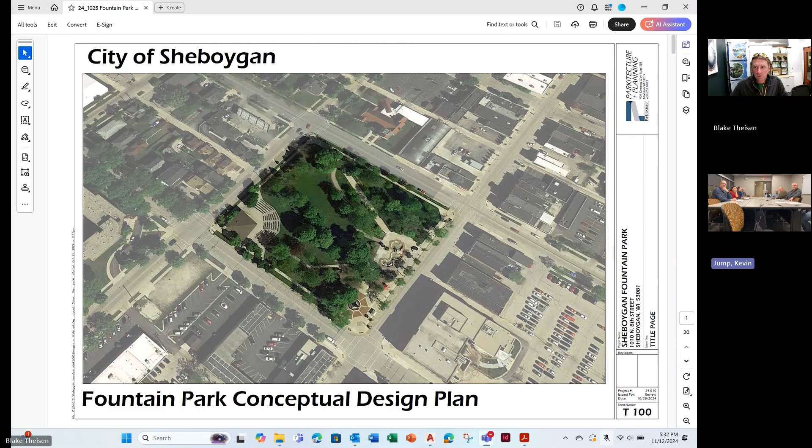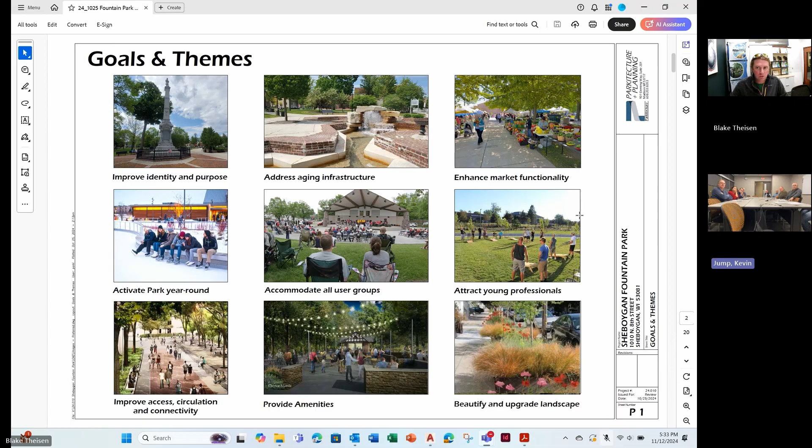So I'll run through some of the upfront items. When we started, we spent some time getting to know both the site itself and the goals for the project. As Joe alluded to, there were a lot of stakeholders that we interviewed, and I'll flip through here so you can see some of the takeaways for the goals and the character we were trying to achieve.

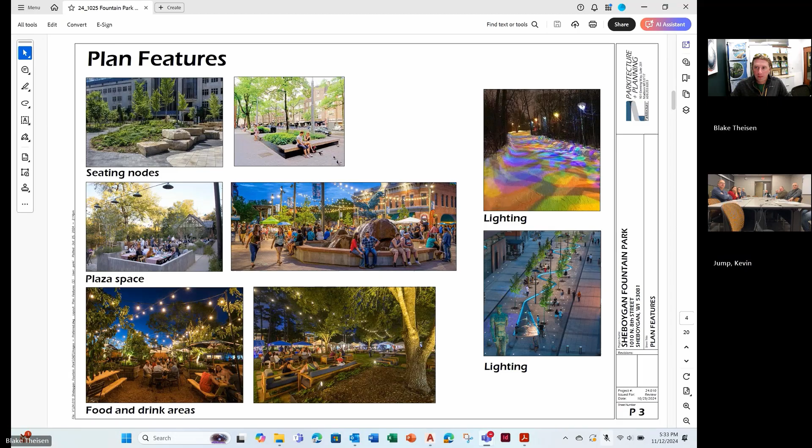I'll highlight some of these. Lighting was a big one. Different seating nodes for different activities and abilities to gather. Water, of course, is a big one, being that it's Fountain Park, so we ended up settling on 2 different water elements instead of just one, and we'll get into that. And then the farmers market, of course, is a major stakeholder and player, so a lot of the design was driven around their needs and desires for the future.

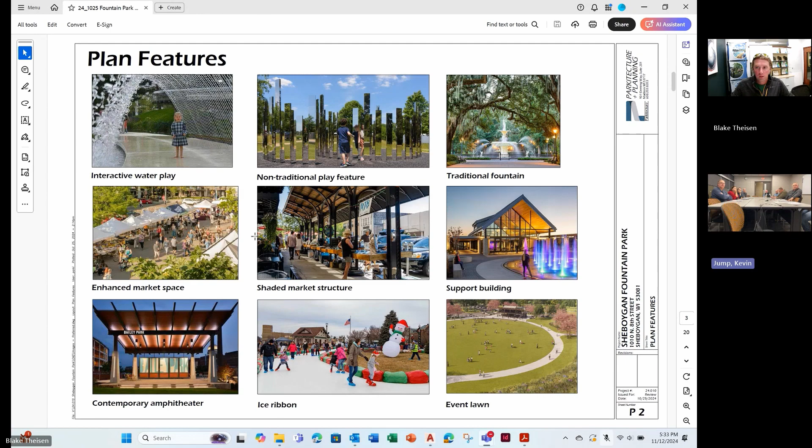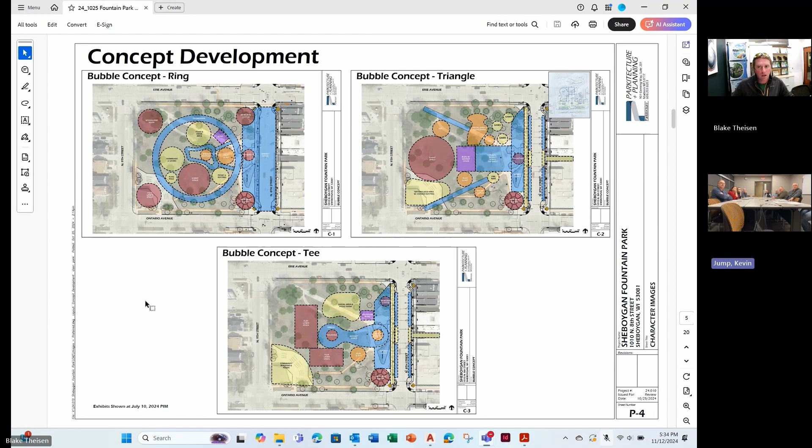So as Joe said, we developed 3 bubble diagram concepts. Those of you at the public meeting have seen these: the ring concept, which was a circuitous farmers market loop; the triangle, which centered a lot of activity in the middle and on 8th Street and made use of the slant walks currently used, especially in the Northwest; and then the T concept, which again tried to draw a lot of energy into the middle of the park. At the end of the day, a hybrid emerged.

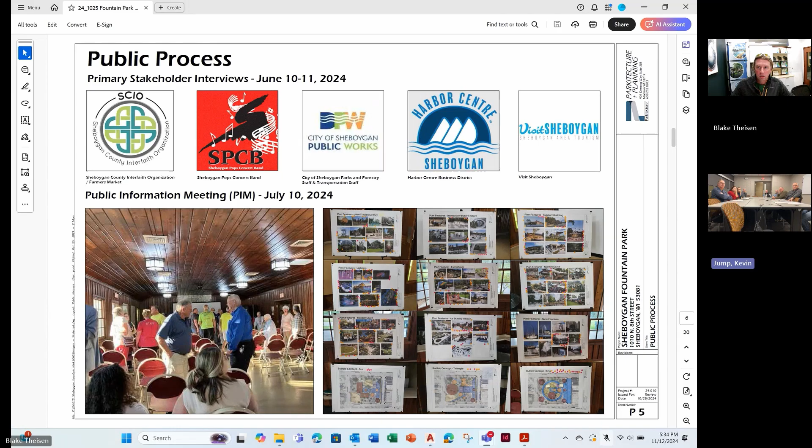We heard a lot of really good feedback at the public information meeting in July, captured all of that on our image boards. A lot of great voting, a lot of good dialogue, and we ended up with the preferred concept, which we kept the moniker of the ring, just because that was really the defining piece: this perimeter farmers market promenade. The center of the park is anchored by a 4-season building, which has the ability to open up on both sides to allow full passage through the park east to west.

We have our classic throwback fountain of our original park design up in the front by 8th, with an interactive water feature in the center plaza. And then our event lawn, now anchored by a smaller version of the band shell—it was ultimately decided that the existing band shell is going to be removed.

There were enough issues with it that it felt like it needed to move on to greener pastures.

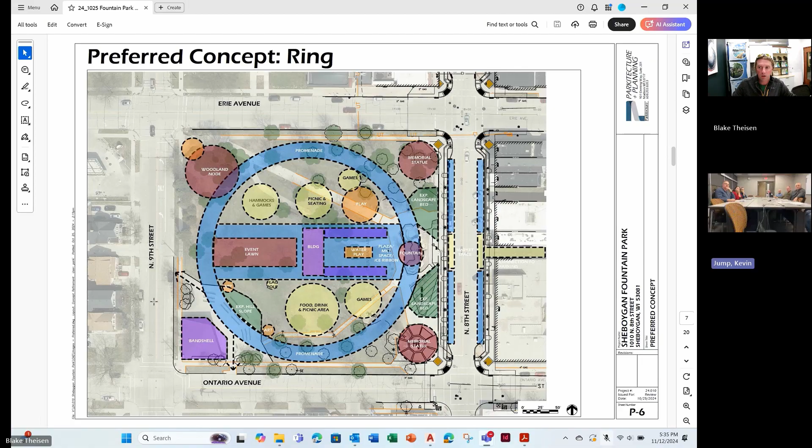The existing Civil War memorial will remain just as it is. We are proposing a relocation of the Spanish War memorial, which sits about here, up into the northeast corner to provide some symmetry of the geometry that we have in the southeast. So now our eastern corners would both be anchored by memorials, which feels very appropriate.

And of course, we've tried to maintain as much flexible open space within the park as we can. I use the term 'designing with rooms' a lot, and you can see we have lots of different rooms in the park for different activities and gathering spaces. So we've tried to activate the park for not just farmers market days, but really 12 months of the year with lots of different opportunities for activity.

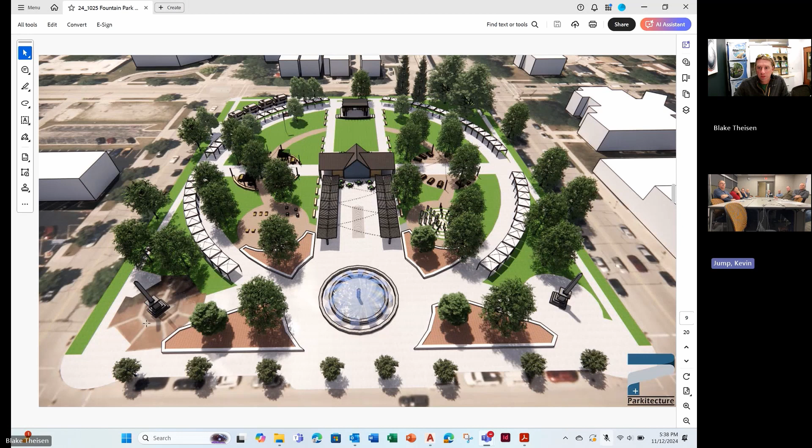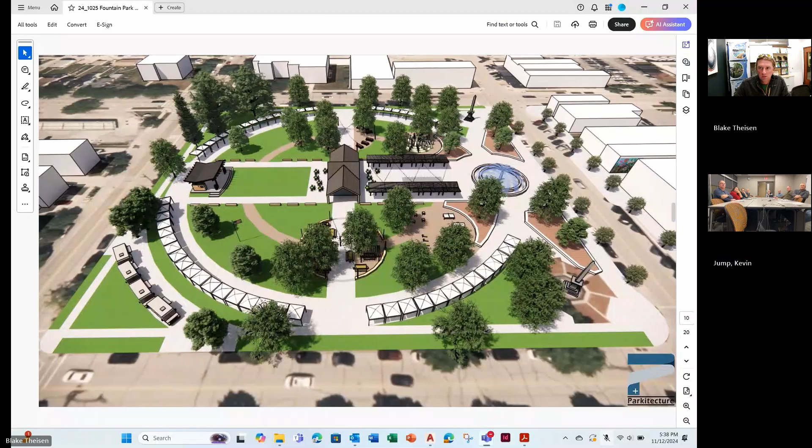So here's the view looking to the west. This is 8th Street, of course, in the foreground. I'm just going to swing around clockwise. This is looking to the north. Looking back to the east, now you can see how that alley becomes a key feature, connecting everything. And looking to the south.

And I'm going to use different angles here. I wanted to show you the relationship of the new band shell and this four-season building. As I mentioned, we envision this wall to be glass garage doors that could open up and allow site passage from this space all the way through the building into the plaza.

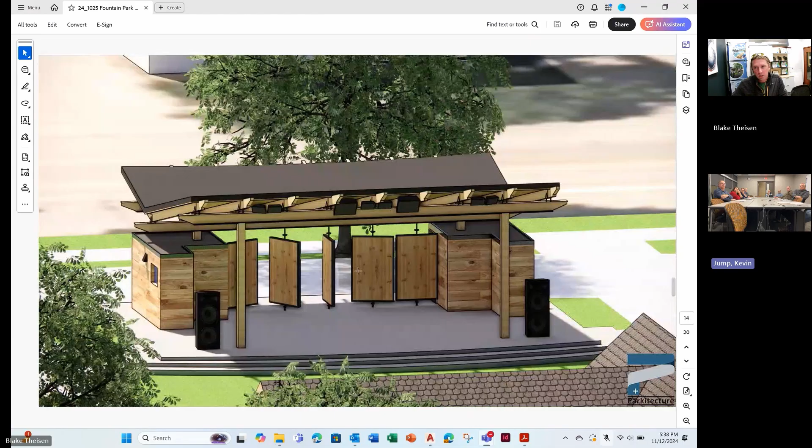We envision the band shell to be a flexible space that can function as a backdrop for performances with these rotating panels in the flat position. But when it's not being used for special events or performances, you can rotate them 90 degrees and pin them, which allows for light and air movement and pedestrian movement through. This just becomes a flexible picnic space or covered shelter.

We have adopted this gull-wing design to mimic some of the geometry that we see in Sheboygan on the lake with either seagulls or sailboats, but this kind of nautical nod here in the roof line.

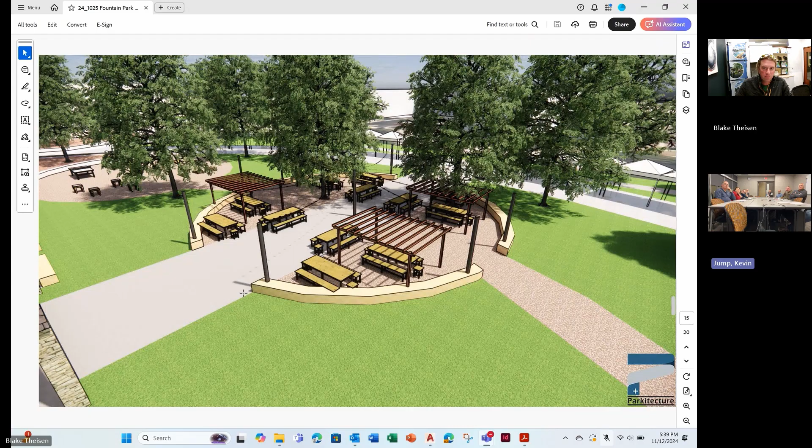I'll highlight real quickly some of the other rooms. If this four-season building in the center wants to take on a life of some sort of concessionaire, whether it be city programmed, you could implement a small beer garden, or maybe it's a lunchtime eatery. We've got two locations for that.

We also have a game room located next to that beer garden space with concrete bag toss, potentially ping pong, and other adult-oriented games. And here you can see how the central plaza starts to work with the classic fountain and then our interactive water feature in the ground plane that would not only have water elements, but it would also have lighting. So all of the ground jets would be lit at night, giving a glowing ambiance from the ground and above with our catenary string lights.

As I mentioned, lighting was a very important piece that we took away from all the input we gathered, and of course your downtown lighting study, which was well done. So we wanted to make sure we were honoring some of those elements that have been produced and tested here.

Just another view, you can start to see how the farmers market engages with the central plaza and the fountain space. And as I mentioned earlier, the 12-month draw, we really felt that this design allows you to activate the space all months of the year.

When the fountain is not in use, it could become a lit sculptural piece. This is just one idea of some sort of metallic lit tree for the winter to bring some color and some vibrancy and a vertical element into the landscape.

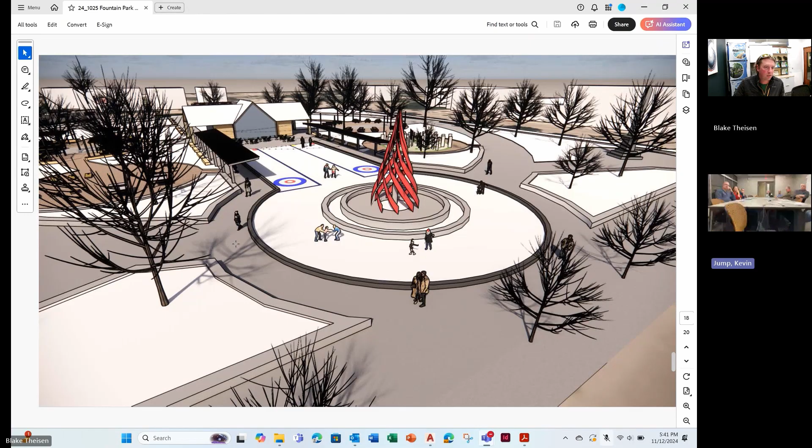We've also explored the use of artificial ice to create a skating ribbon around the fountain, and potentially toying with the idea of half pitch lanes. This isn't going to be a competitive facility, of course, but the idea is that everyone can come out and try their hand and see what the buzz is all about with curling. When it's not being used for curling, it's just flat ice that anyone can recreationally skate on.

Nice shot here of the close-up, you can see the building in the background. Another view - those lights really become important in winter, since as you know, it's now 5:30 and it's pitch black outside. So both of our beer garden areas also have catenary lights, again trying to bring the lighting into all the different rooms of the space.

I think those are my highlight shots. I'll pause, Joe - what have I missed?

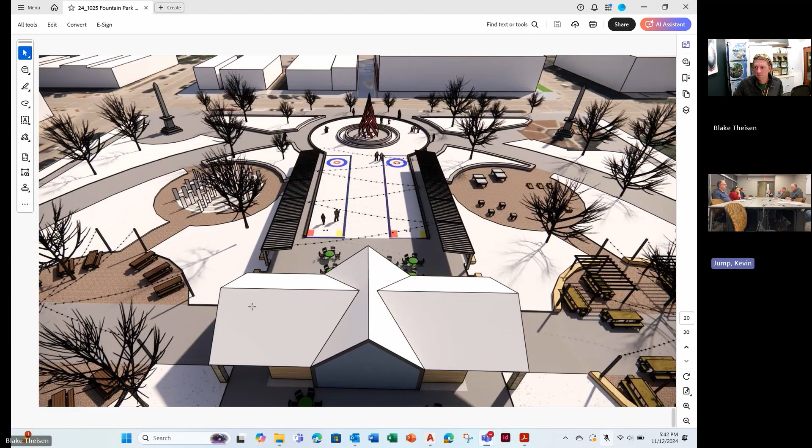I don't think you missed too much. The goal is to move this on to the city council for approval. We are looking for a pretty fast turnaround this year yet, for entering into a contract for schematic design, final detailed design, in preparation for construction documents.

So with some available monies, ARPA funds at this time, this could move to that step, those next steps, fairly quickly if approved.

curling, and the location of the curling. The idea of having the curling was great, but possibly maybe having the curling off on one of the sides, separate from the skating, because of the fact you're rolling the stones out there while people are ice skating out there.

So that's one thing that maybe if we could possibly look at making that change - because I really think it was a positive change that they did add. We did look into it, and we think we could give you the curling lanes either on the south spine or potentially the north spine.

I think that would work quite well. And if we really needed more geometry, we could look at the west spines. But we want to try and keep this area flexible in case you had a winter festival or something else - but I think there is opportunity for sure.

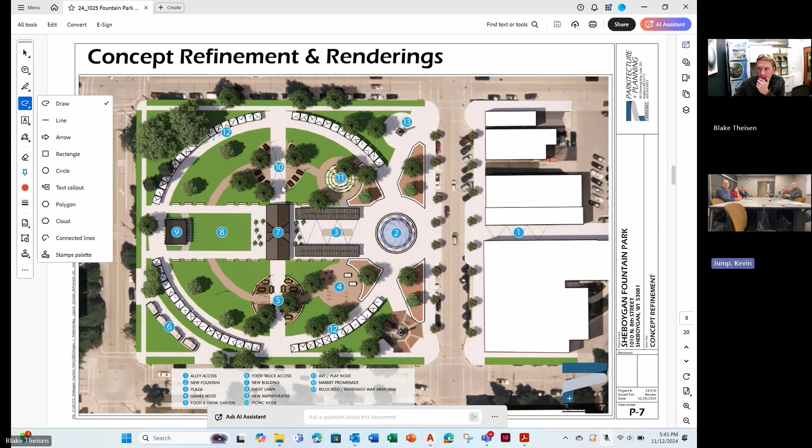Both the north and south sides have those two intersections with the bump out. So you like the bump out here, but you'd like to see improvements on the north and south side of the adjacent intersections. Yeah, those two crossings are very long compared to the one on 8th Street, so it would be great to see that be consistent on both. Got it, thank you, good comment.

I have maybe a couple questions, comments. With the curling and ice skating, is the idea that the city would own the stones or the skates and rent them out, or would people bring their own stones?

At this time, at least through the process, there's the possibility of having an open concession stand, and yes, the possibility of renting skates and other items needed during certain times. That's a possibility.

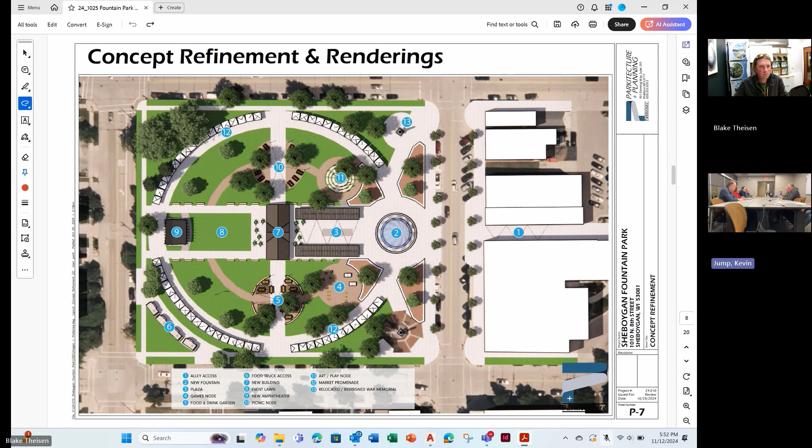So I guess I would be looking for a motion. Just one other question - do we know, Joe, what we have as far as ARPA funds, what would be available? It sounds like at this time, yep, that we would have enough to move, if again through the council, we would have enough to move ahead with schematic design, which would be next, the final detailed design, and then start the preparation of the construction documents. Approximately $289.

And that would all come from our fund, so that could get wrapped up and approved this year. It's the one line for grants, then the construction part of it - parkland dedication fees, different grants. We've already sat down and talked about several different items, and then the TID will take care of the rest. So this would not be a burden - that's the whole point behind this, it's not gonna be a tax burden.

I move to adopt the resolution. Second. Motion made and seconded. Any other discussion on it? All in favor? Aye. Opposed? Chair votes aye, that is approved. Thank you, Blake. Thank you, I appreciate it.

All right, number 7, item number 82, 2425, a report by Marina Parks and Forestry, to whom reviewed the Fountain Park conceptual design plan, recommends that the Public Works Committee that the plan be approved.